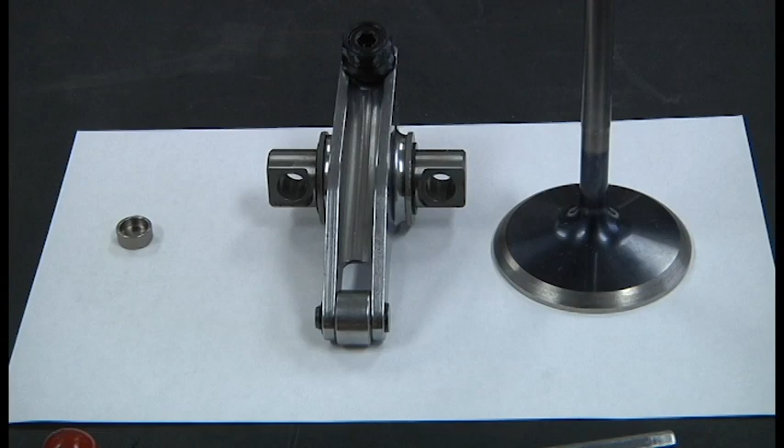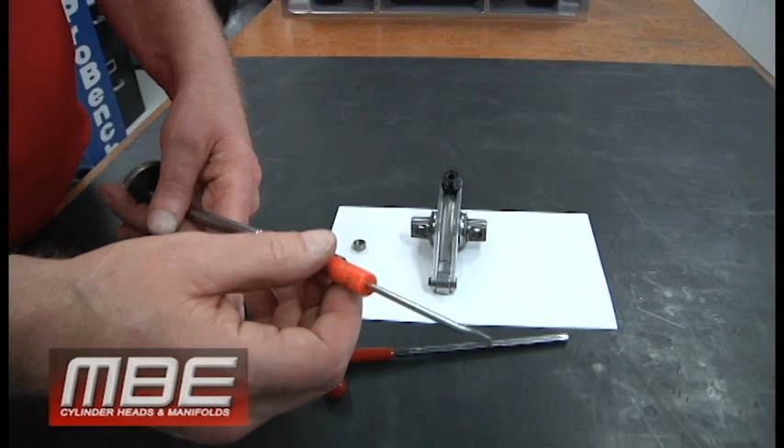Today I'd like to discuss why a lash cap is more durable than a steel tip on a valve. So if you can see here, we've got the magnet here, it's titanium. In titanium valves you have to run a steel tip because the titanium is too soft. The rocker will wear it out.

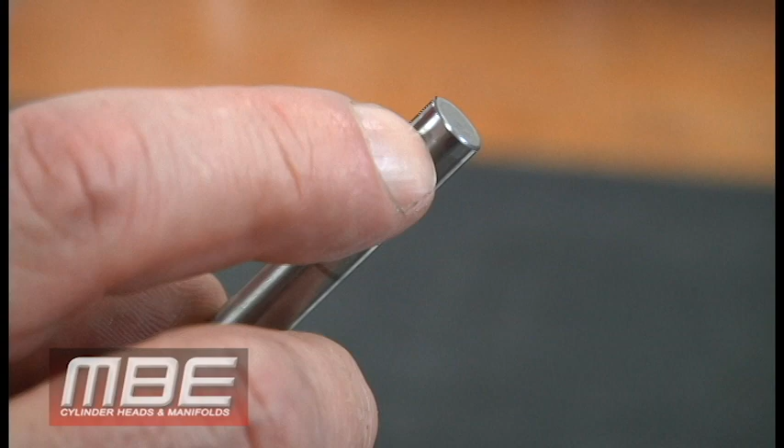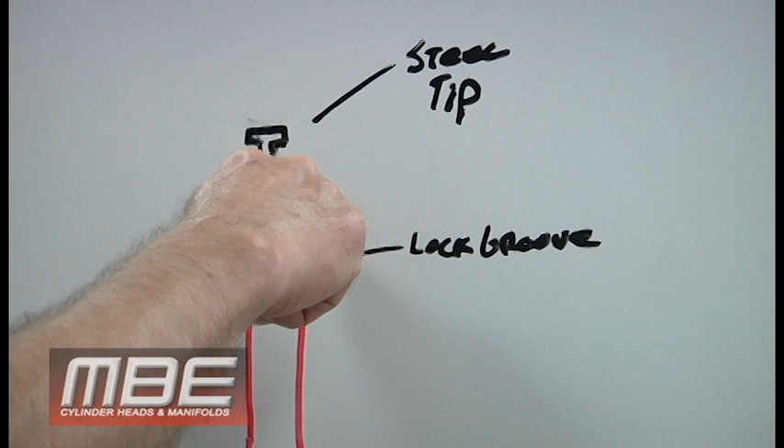If we get up closer, you can see the color difference. So you can see the steel tip is from here to here. And how that is put in there, there's a post. Here's the steel tip, there's a post, and the steel tip presses into the end of the valve right here.

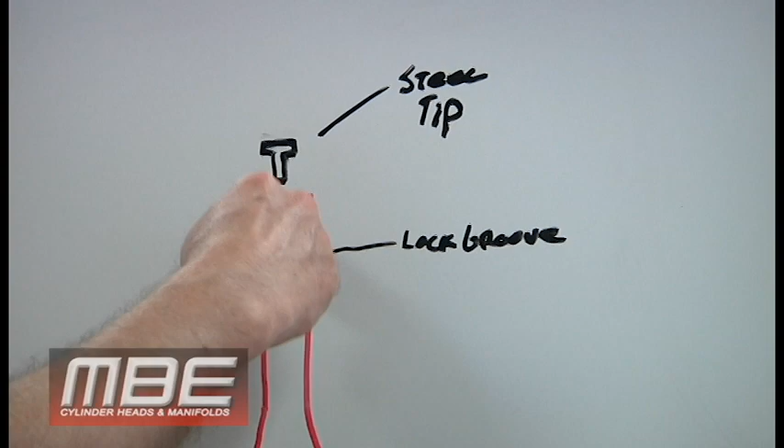And the valve companies never go to the lock groove because that would be a shear point. If this went down there, then that would be a shear point, and then the tip of the valve would break. So even valve companies would rather you run a lash cap than a steel tip. At least every valve company I've dealt with has told me this. Reason being, this doesn't have a tendency to fail ever when you put a lash cap on it.

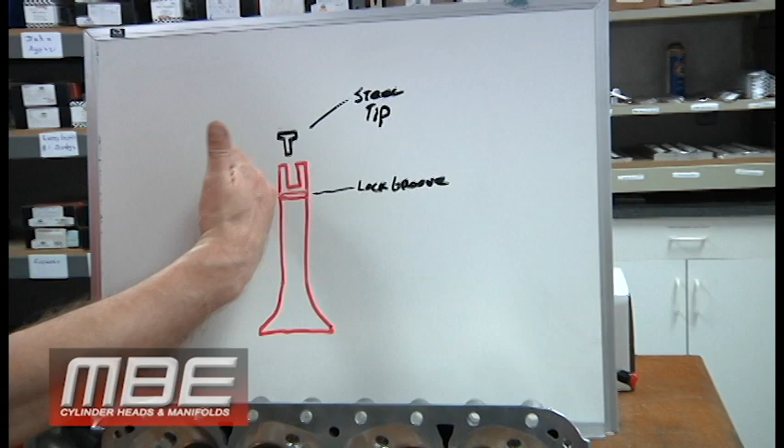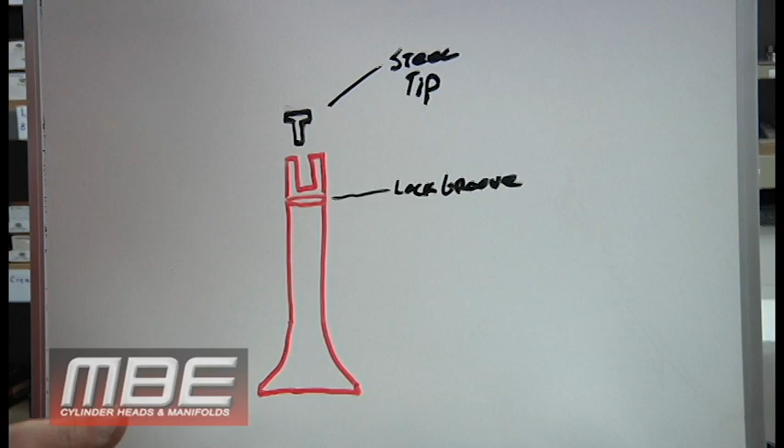This typical lash cap right here is 110 thousandths deep. It sits on top, and that takes care of your steel tip. So what happens here though is the rocker rolls back and forth on this. Sometimes we've seen that the steel tip, that post can work itself loose because it's titanium, it's soft, okay? And every once in a while we see steel tip issues where the heat treat's not correct either. So this gets rid of all of that.

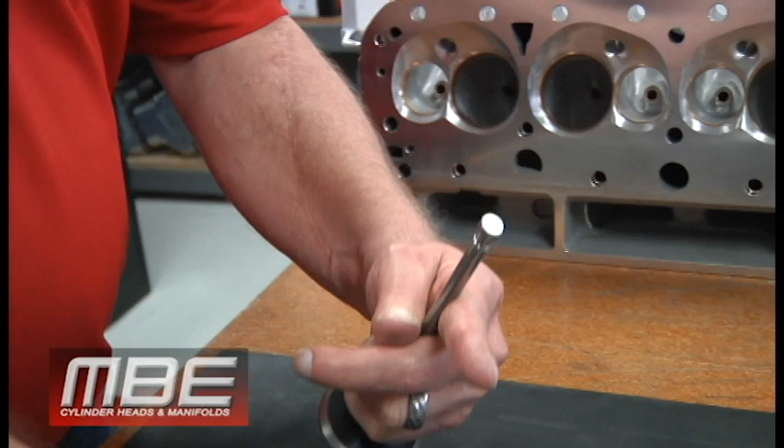So if you just run a lash cap on top of your titanium valve, that's great. The one thing you never, ever, ever want to do is put a lash cap on top of this steel tip. Reason being, if you can imagine the rocker going back and forth, back and forth, back and forth across here, what it will want to do is shear the top of the valve off. And then the valve falls, and then you have oil pan failure. So always remember that, everybody. Do not run a lash cap on top of a steel tip because eventually it will fail.

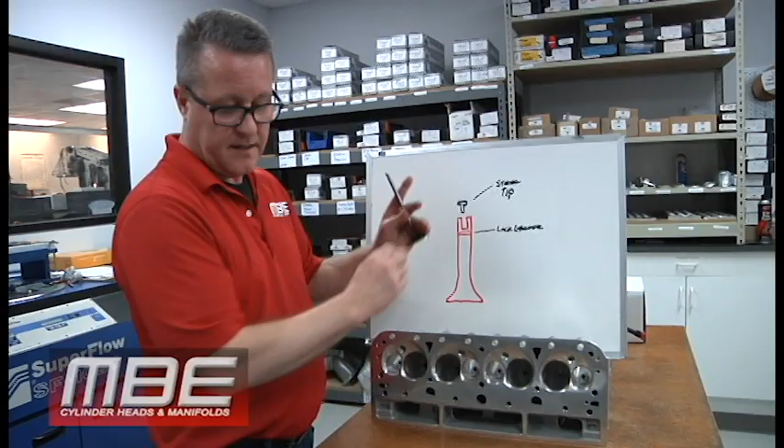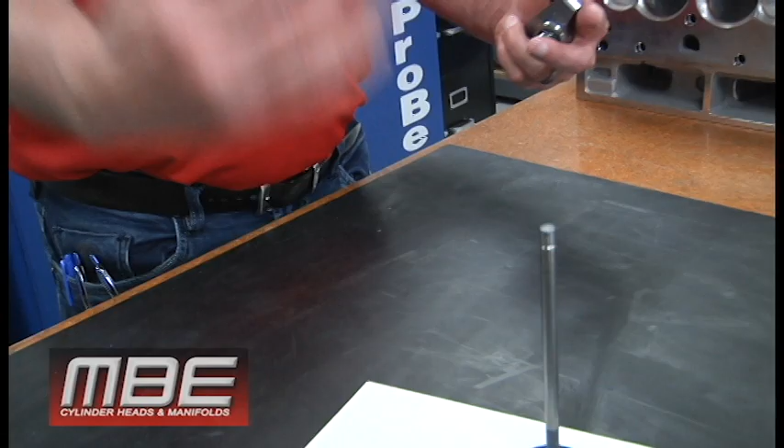The other thing, there's an argument sometimes you hear. Mind you, I told you this is 110 thousandths deep. You hear arguments sometimes, well, I want to run a steel tip because I don't want my lash cap falling off. I had a lash cap fall off. Well, I think what we need to do is just be a little more accountable and think about why did the lash cap fall off. And I say this because it's very difficult to do.

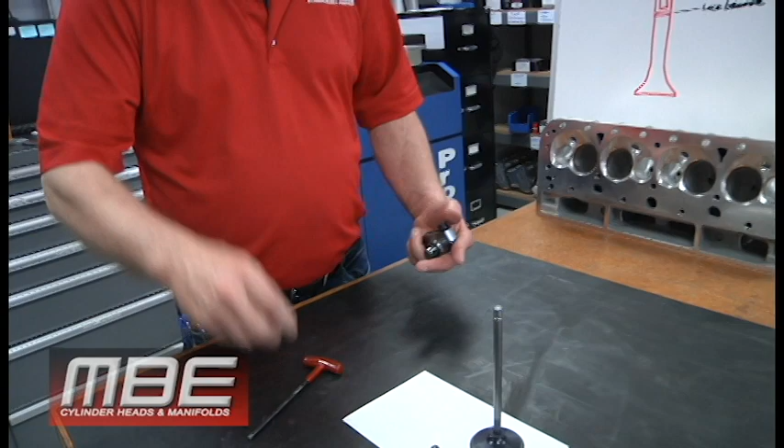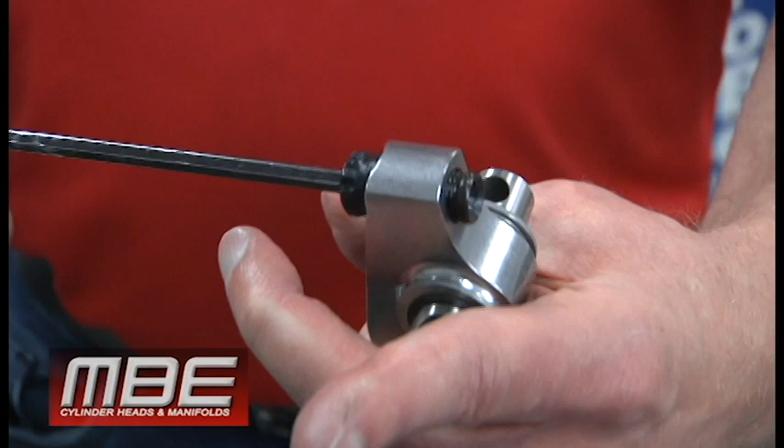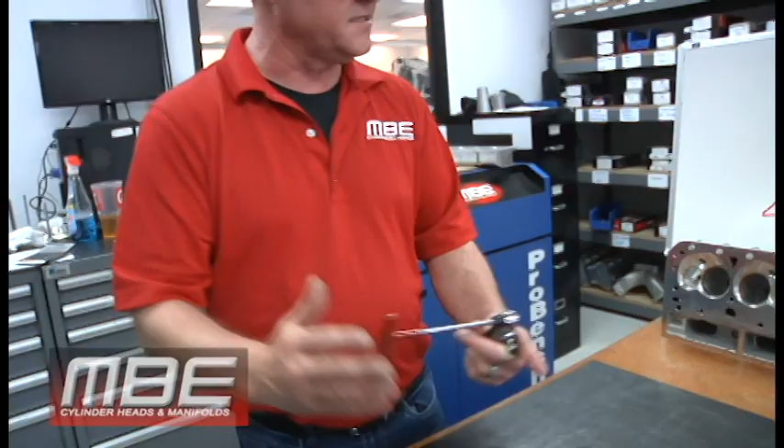So for that lash cap to fall off, the adjuster would have to back off 2.5 turns. So you go half, 1, 1.5, 2, 2.5. Does that ever happen? No, it doesn't happen. So I'm not a big fan of that argument because this is a much better way to go. The weight is a push, it's not a very big material, even in steel. It's probably less than a gram, so it makes no difference.

But the important things are: the lash cap makes it more durable, and never run a lash cap on top of a steel tip.